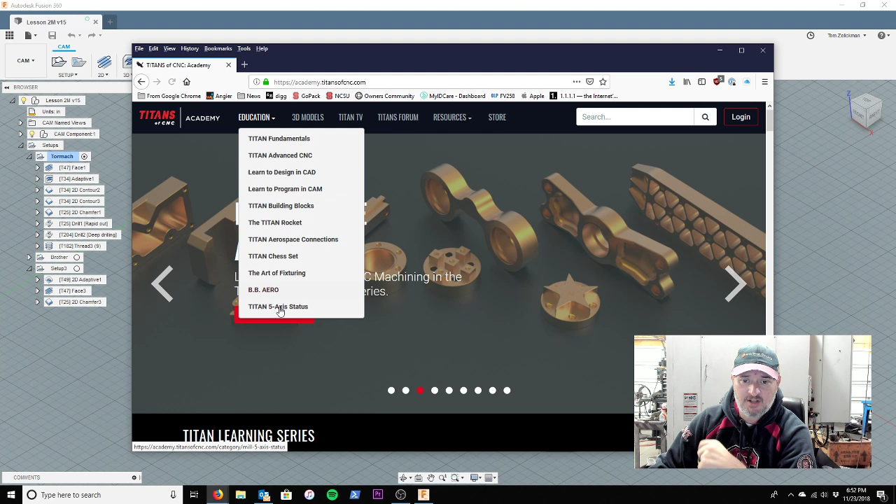All right, so let's talk a little bit about the Academy. If you don't know, Titan Gilroy of Titans of CNC has this free training academy out there called Titans of CNC Academy - academy.titansofcnc.com. In here, there's all kinds of things. In fact, let's go to the building blocks. The building block series is the first of the series that he did. So all of these different parts, you go through and they build on each bit of the system that you've done.

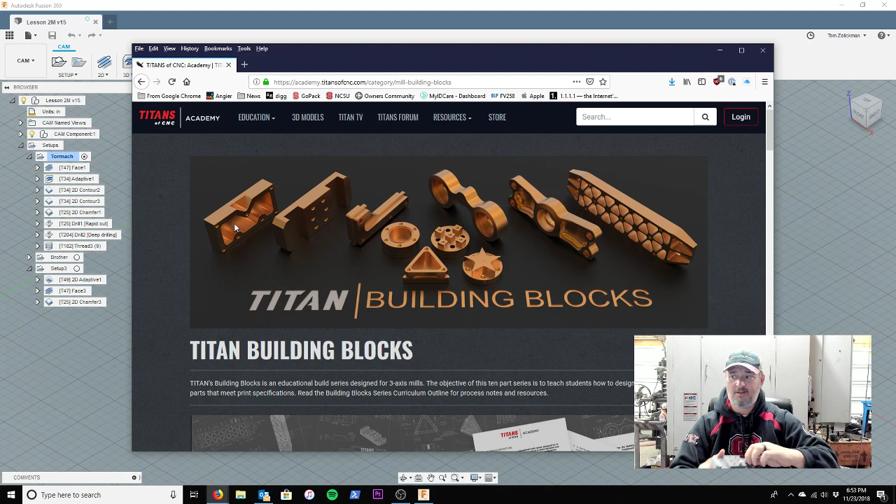For instance, we'll do this one right here, number 2, this is 2M. You've had to learn how to do your basics, some drilling and tapping and things like that. What's nice about this is it builds on all these things, but you don't have to have a mill to do it. In fact, let me switch back to my other view. Here's a 3D printed version of that part.

Threads and all - in fact, the threads work, 3D printed, just like that. So the first thing you get out of this is the ability to do your designs and test them out. You don't have to have big machines. You got a 3D printer, whatever - take it to a makerspace, whatever you're gonna do, you can start using this. So the instruction you get, even if all you do is focus on just the design side of it, you're gonna learn how to make a lot of different kinds of things.

But let's say you do go to a place where you can do the machining and actually make the part. So here it is in aluminium for my friends across the pond - same part, it takes you to that next step. You don't have to be a machinist, you don't have to want to be a machinist. The whole thing you're really getting out of this is that you don't have to go out and buy everything. You can make things for yourself, you can design things yourself, you can get in there and really start working with the equipment that you have.

Hey Zach, good to see you. Yeah, you can 3D print - I know you've got that printer, so why not? Go through the academy, start working on it. There's a lot of things you can do. It's going to teach you so many different things. So yeah, that's the first thing.

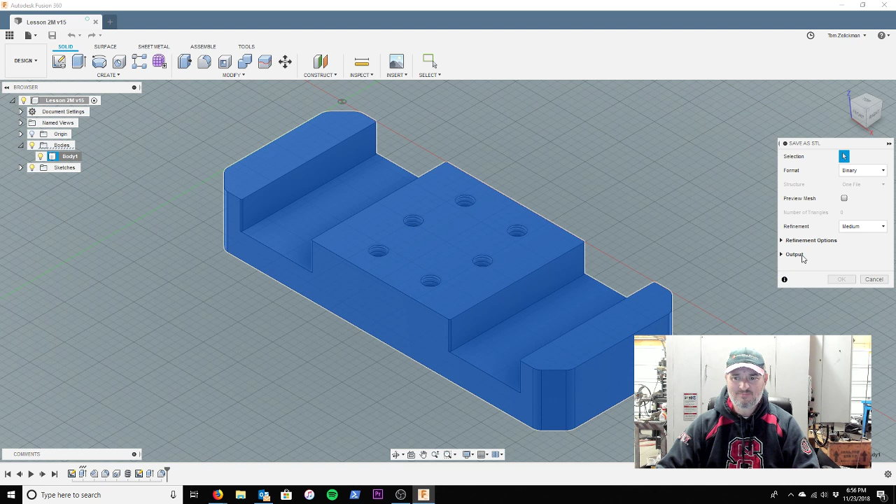How refined do you want this to be? How pretty are you trying to make it? In some cases you can even send it to a 3D print system on your machine, so Print Studio, Mesh Mixer, Preform, or Custom. I don't ever do that, I just go ahead and save the STL.

Click OK, it wants to know where you're going to put it. Here's my downloads, click Save. That's it, bring it into your slicer and you are now ready to go. So pretty simple, pretty straightforward.

Let's take it a step further though. So here, and you can see it behind me, I've got a big VMC here, but I've also got a Tormach 440, the smallest of them, really it's a benchtop size machine.

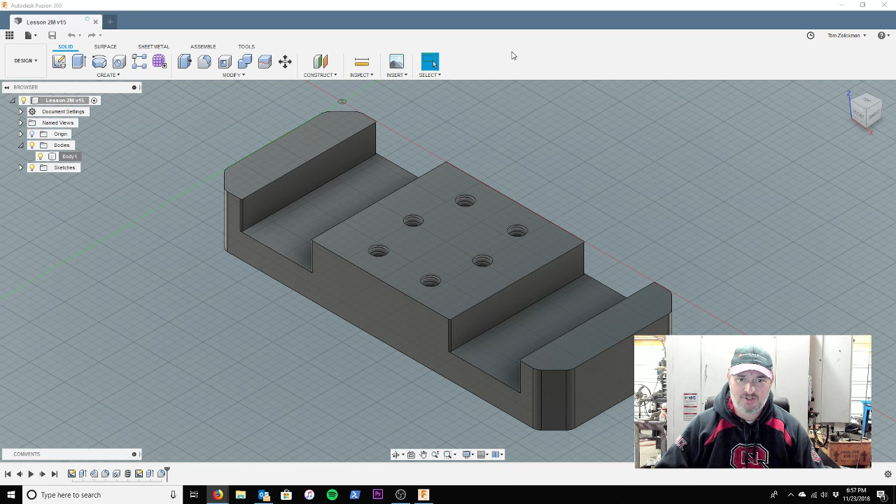I still make these parts on there. In fact, I host Academy Small Group number 83, and that's the machine that people make parts on, is the 440.

I think it actually teaches you more than having a machine that you can just brute force your way through on a mistake. With this machine, you have to be right. It doesn't have enough horsepower to power through something. If you make a mistake and push it too hard, it's going to stall. So you get really good at listening to what's happening and how it's going.

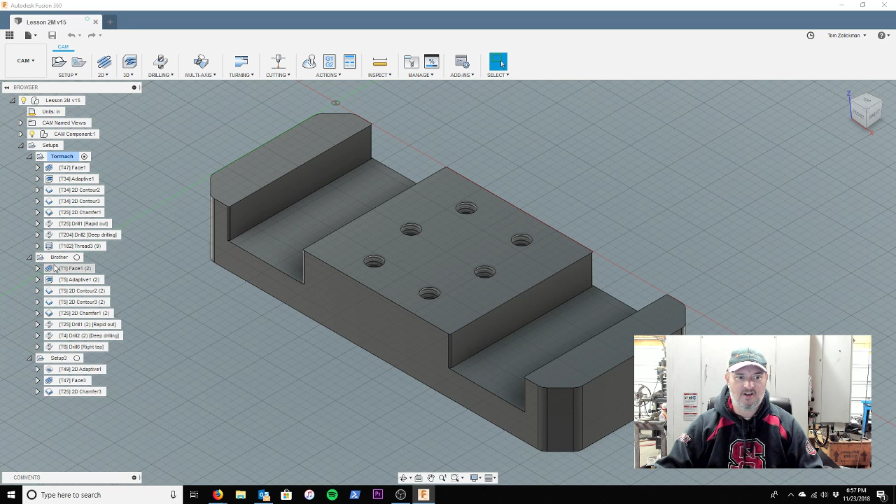But the other thing you have to take into account when you're doing that is you have to take a slightly different approach. So as you can see, I've got in my CAM, this is how I do it on my Tormach, this is how I do it on the VMC.

I've got the Brother too. So let's focus just on the Tormach right now, because there's some things in here that are a little different. We're going to use a fly cutter first off.

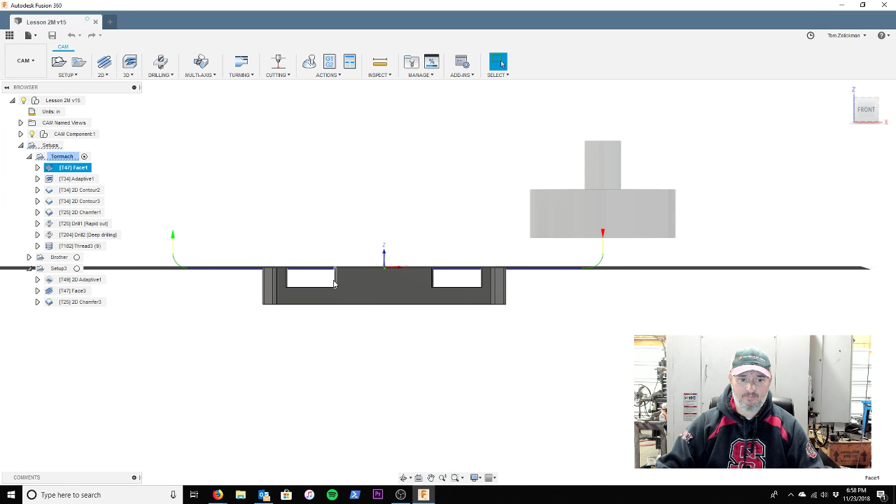Some things are the same though. You want to make sure that when you're coming in, you're giving it plenty of room to come in and clear fully before it comes out, right? No different than the face mills you're seeing in the videos that Titan does.

The next thing I do on this one is I came in and did an adaptive clearing, so a 3D adaptive clearing. Now with 3D, the difference, and this is something a lot of people don't always follow, is that in 2D adaptive you tell it the specific height you want it to work on. In 3D adaptive, you just tell it the body and give it a range and say anything in this area, and the system is smart enough to figure out what needs to happen.

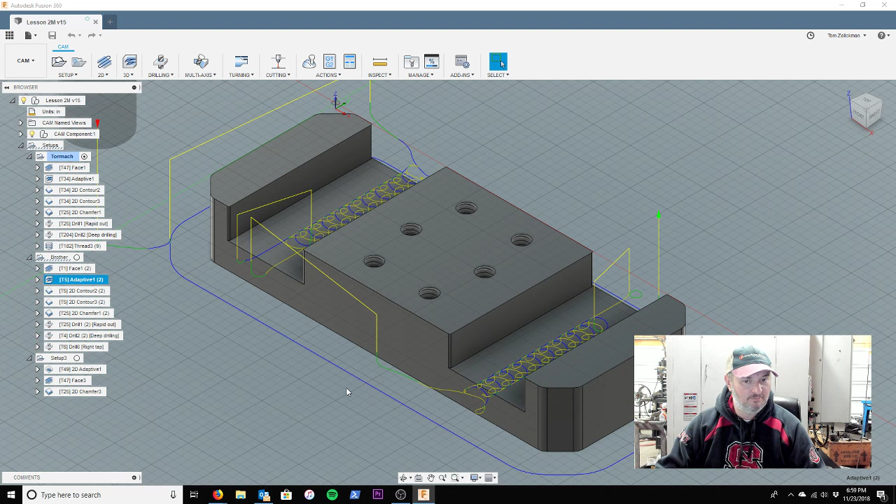So here's my 3D adaptive, and if you look, there's a lot of little cuts in here. If we compare that to the big VMC, you'll see it can take a bigger bite. Very different approach. So even though it's the same CAM operation, you have to know what your machine can and can't do.

Ace Davis, howdy. Hey, sorry, I'm a little behind too, so I'm trying to watch a couple screens at once. But yeah, so you have to do things a little differently.

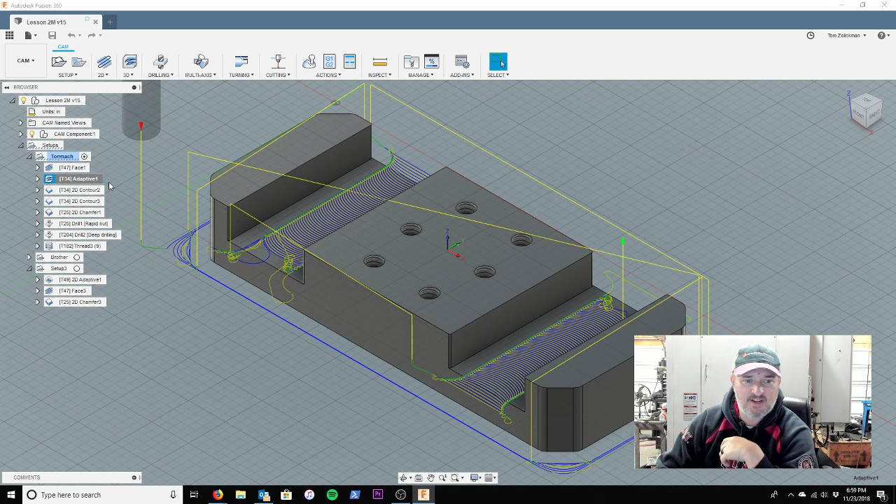So let's come in and take a look at it. In this case, we're running a 3/8 inch end mill, it's a 3-flute, high helix. We're blasting it, using every bit of spindle that we've got, but we're still cutting at 75 inches a minute, so it's pretty good speed. But notice feed per tooth is 1.5 thou.

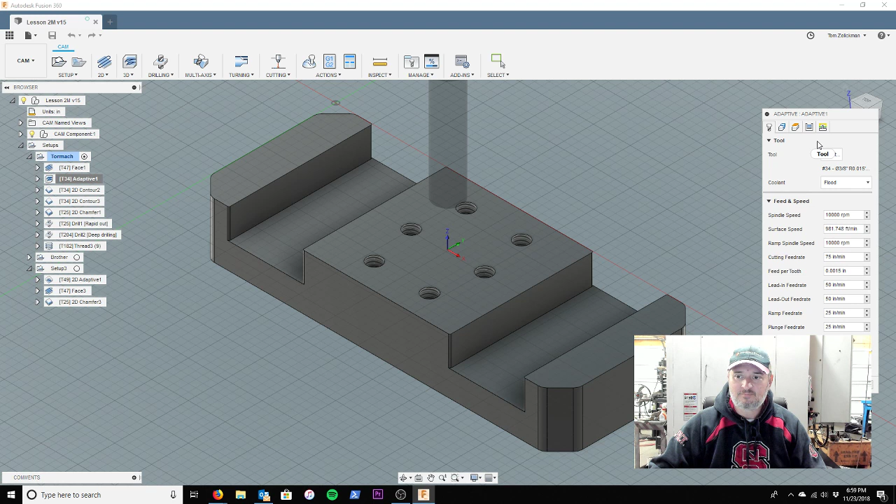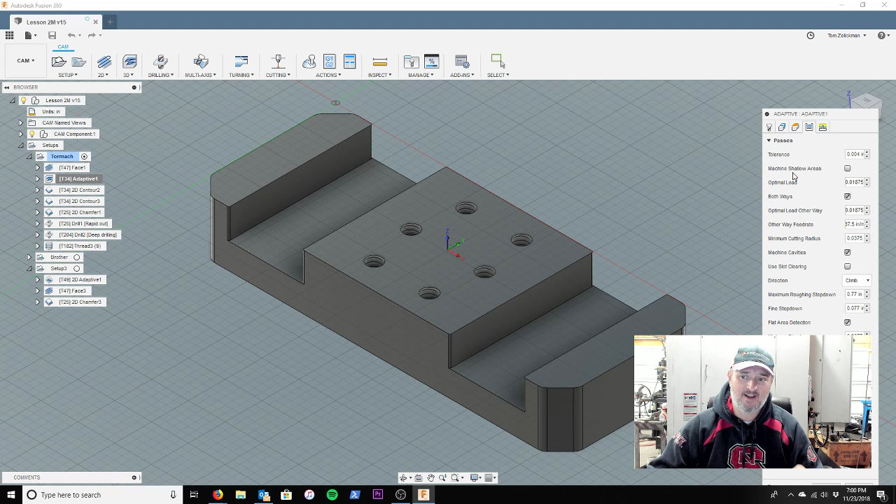The big thing here, if you look at our geometry, our heights, things like that, that's pretty standard on this one. Notice how I tell it to go a little below, we have to take into account the radius on the end mill, things like that. Exactly the same kinds of things you get in the instruction. But here, in the passes tab, this is where we really start to diverge, and you'll see...